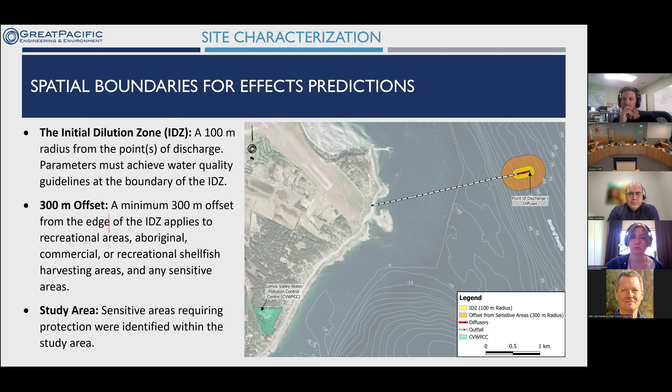Sorry, skipped ahead here. So going back, in 2008 we deployed a current meter off Cape Lazo and did some other oceanographic work. One of the main findings is that your currents generally just flow to the south. Almost all of the time it's heading in a southerly or southeast direction, and it follows the natural depth contours of the water.

So we expect that the majority of our effluent, after being discharged, heads down to the south. And if you see the next slide here, that's generally away into more open waters, away from the shoreline, which is a decent placement for the outfall.

We did a bit of an inventory of potential receptors of concern. So within that 6 kilometer zone, but outside of your 400-meter offset, there's parks such as Kye Bay, Point Holmes, where obviously those are potential concern if people are in the water, swimming, kayaking, paddleboarding, and we wouldn't want those people interacting with the effluent plume.

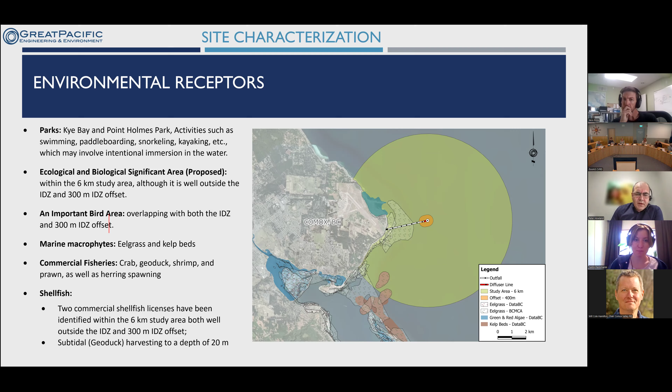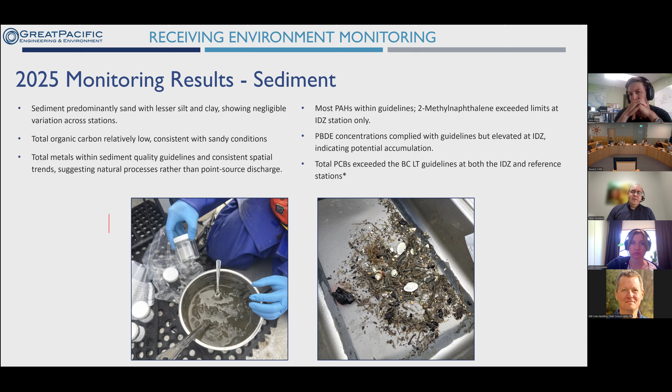So we're not seeing a reduction of our benthic invertebrates at that station. But this is something that would require several years to see if there's any impacts from this. But this first little indication would suggest that things are relatively consistent and actually maybe you have a higher abundance at the point of discharge.

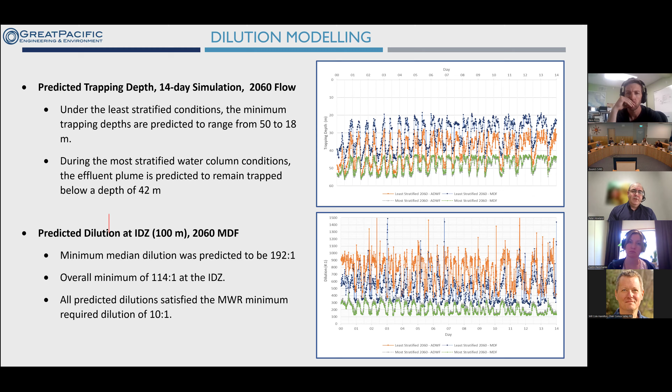So our assertion is these are all quite low risk parameters. So we don't expect there's any chance that you're going to exceed a temperature water quality guideline or total suspended solids guideline. And that's the same for all the zinc, PAHs, PBDEs, PCBs. So these are going to be well below water quality guidelines based on that dilution modeling.

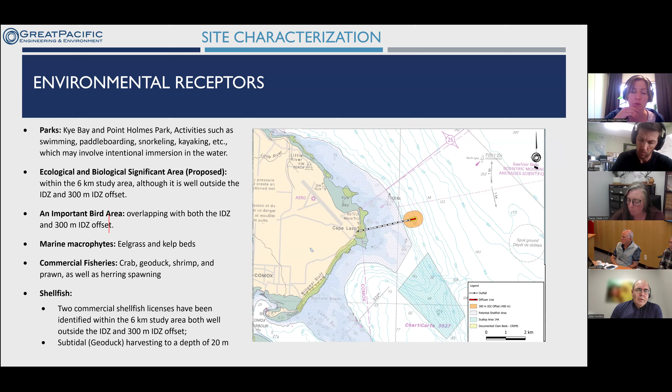Thank you, everyone. Yeah, thanks for sharing, Peter. I really appreciate it. I was just wondering, what water quality guidelines were you using? Were you using like marine aquatic life or primary contact recreation? I'm just trying to understand how you assessed which guidelines you were using. Were you using the most conservative one for any given parameter? Yeah, so I was just trying to see. I think I had, but

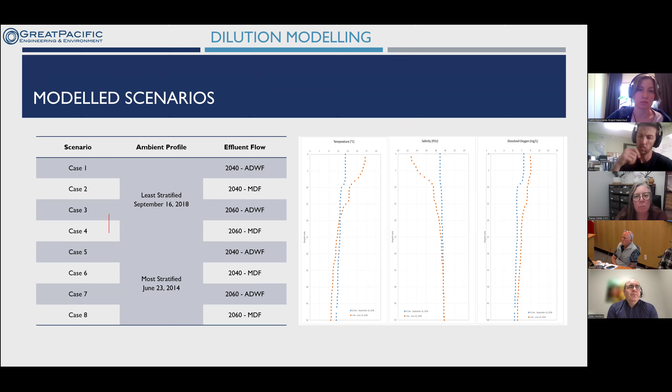yeah, primarily it was marine aquatic life guidelines. So the vast majority of those were compared to marine aquatic life guidelines. All the effluent as well, we compared those to marine aquatic life guidelines. And then there are some guidelines like the shellfish harvesting and recreational guidelines. Those were all included in the program as well.

Okay, great. Is it okay if I ask a follow-up question? Sorry, Caitlin, we're just having a hard time hearing you. No, I was just wondering if I could ask a follow-up question. She wants to ask a follow-up question. Oh, yes, go ahead.

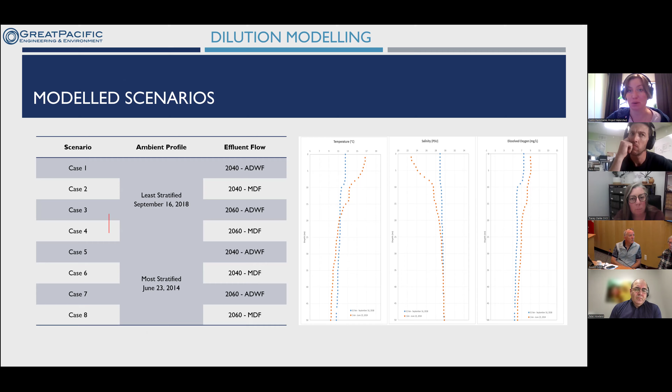Yeah, so I was just wondering if there's the desire to include any other parameters in the assessment. I'm thinking about some up and coming emergent contaminants like 6PPD-Q or some other ones like that. And then because of the importance of this area to shellfish, I think really reflecting on that decision to do some tissue sampling would be really important for future monitoring efforts.

Okay. Yeah, this was the list of the parameters of potential concern, based primarily off of the available marine water quality guidelines. So we didn't extend into parameters that presently don't have guidelines. And just because that list grows and grows pretty quick, we kept it down to all those parameters that have guidelines, and there's something qualitative or quantitative that we can assess it against.

Totally. Thank you so much, Peter. No worries. Thanks, Caitlin. And I think, Ian, you were first.

I'm trying to remember the exact words that I saw, but there was the category 1 reliability, I think, was the words that were used. I would just like to understand a little bit more about what these categories are, so that we can put that into perspective when we're looking at the rest of this presentation. Oh, sure.

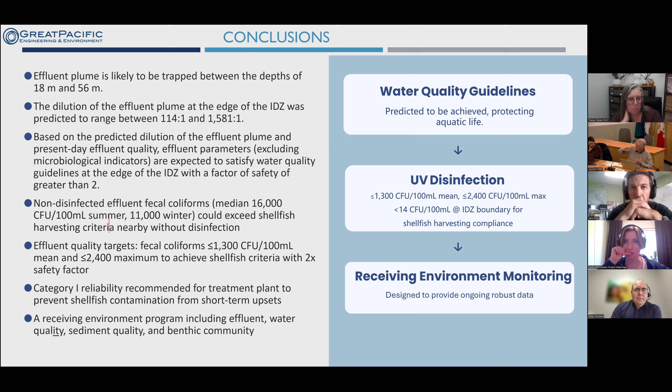There's a 6-meter variation between extreme high and extreme low tide. So we got 6 meters on top, flushing in and out twice a day, and 60 meters depth, where you have a volume every day of liquid going out there. I'm just kind of getting my arms around the scale of what's going on. And I did a little calculation, which was, I think I picked up somewhere a figure of 76,000 cubic meters per day is kind of the maximum amount of liquid that's coming out of the pipe. Is that roughly right? Yeah, I have that number way back at the start.

Okay, now I'm grappling with what does that look like, and I thought, okay, that's going to look like this building, the volume of this building, kind of thing, every day. Something of that order, like a 40-meter cube or something like that, flushing out into the ocean. Now, where am I going with this? I guess let me ask this question.

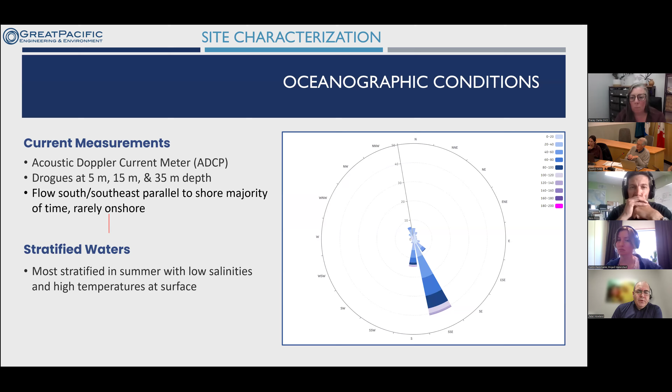Does your study say anything about the adequacy of treatment that's envisaged in the plan for the treatment plant? Does it say that we're doing too much treatment or too little treatment in order to meet the water quality guidelines? Did it say anything about the design of the plant that is good or bad? What does it say? Yeah, so that goes back to our final assessment of the parameters of concern.

Generally my understanding, and now I'm not a wastewater treatment engineer, but for the most part, when you're looking at the municipal wastewater regulation, the design of the treatment plant, generally you're looking at the suspended solids content of that treatment system. You're looking at the biochemical oxygen demand, and bacteria and then maybe ammonia and phosphorus. You're looking at some of those nutrients. So generally, when you're specifying the level of treatment, you'd be looking at those primary parameters.

So we have not recommended additional treatment beyond what is the minimum requirements, which is a total suspended solids concentration of 45 and same for BOD. So when we look at this summary, what we're saying is that everything that we've identified as a parameter of potential concern, we expect to meet water quality guidelines at the IDZ, and therefore we're not recommending a higher level of treatment than what is being proposed. If these water quality guidelines were not being achieved, then we would want to be looking at a higher level of treatment.

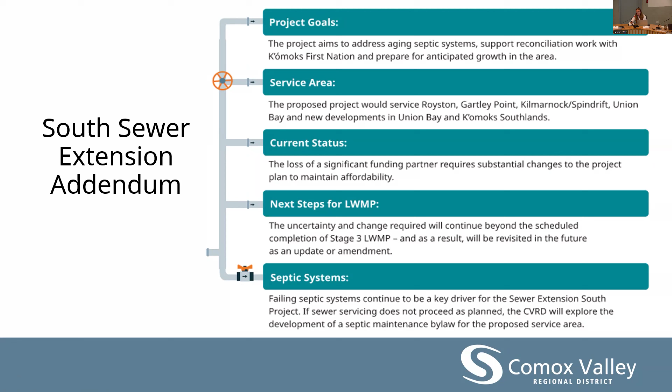Yeah, and this is on the following slide as well, but failing septic systems were kind of a key driver for the project itself. And so this was discussed quite a bit during the addendum process, but if sewer servicing does not proceed as planned, there is a commitment to explore the development of a septic maintenance bylaw for the proposed service area. You can see that in the commitments.

So given the current project status, the Sewer Extension South commitments in the draft Stage 3 LWMP are as follows. A commitment to continue to advance planning and design for the project, considering affordability as a key criterion for successful project delivery. A commitment to continue to seek additional grant funding and partnership contributions for the project, in addition to the $30 million in provincial funding that has already been secured.

And then, as I just mentioned, a commitment to explore development of a septic maintenance bylaw for the proposed service area, which was a commitment carried over from the addendum, given that failing septic systems are a key project driver. And this was consulted on during the development of the addendum. And that's all I have, but I welcome comments, questions.

Anything. Mary? I'm not sure whether this is really facile or not, but if we were looking at installing the South Sewer project and that's been dropped because of the primary funder leaving, is there no way of pairing with the idea of a septic maintenance bylaw to provide low or no interest loans to the homeowners down there? If their septic systems are the primary driver, is there no way of assigning that money to providing that as an option so that we may not need the South Sewer?

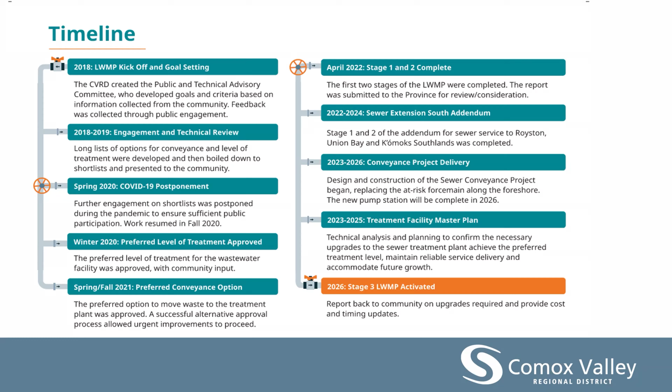So this is just a fairly quick overview of the previous consultation during the stage 1 and 2 plan, really showing the significant amount of engagement that has gone into all of the phases of this planning process. So at that time, 13 TACPAC meetings, as well as some very good public engagement numbers. And within the body of the stage 3 report, you will find a summary of the stage 1 and 2 LWMP consultation, as well as the consultation that was completed on the stage 1 and 2 addendum for the sewer extension south.

So for this stage 3 process, we've had a few different engagement touch points with the community, starting with a new online Engage page in winter 26 and an open house and tour at the treatment plant back in March, which was fairly well attended. And then more recently, ongoing engagement, again through the Engage page, and then a May 5th open house at the CVRD office, which was unfortunately not very well attended, but it is what it is.

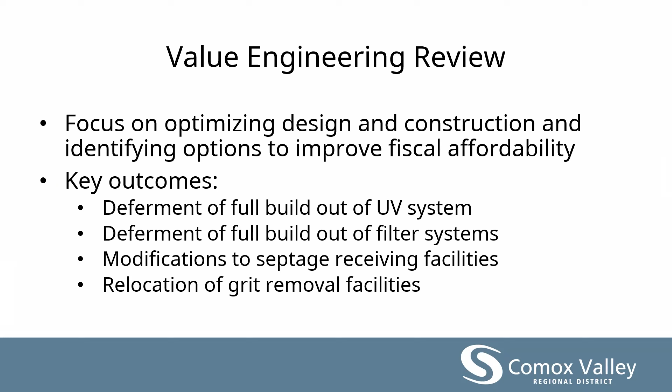I think that's all for that brief overview, but any questions I can try and answer, and if I can't answer them, I'll write them down for Chris to get back to you. I don't want to put you on the spot there, but where you said full build out of the disinfection system, does that infer there's a partial build out for today's flows as opposed to future flows? That one I will have to get Chris to respond to the committee on. Sorry, Jim. Thanks.

Just Ian? Sorry. Oh, sorry. Kevin and then Ian? I think Ian beat me. Go. All right. I'm sure this is going to be why are you asking this question? And I don't mean that in a bad way.

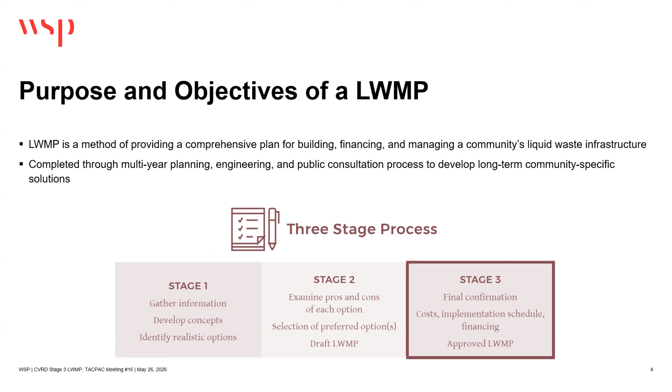And then stage 3 involves confirming the final preferred option, developing the costs, the implementation schedules, and the financing needs, ultimately leading to an approved liquid waste management plan.

So from a regulatory perspective, the liquid waste management plan is not a requirement, it is voluntary. But the BC Environmental Management Act allows local governments to develop an LWMP for approval by the Minister of the Environment, and there are distinct benefits to doing so. So the approved LWMP provides borrowing authority for local governments without the approval of electors to implement the approved liquid waste management plan. Once the final plan is approved by the Minister of the Environment, there is no mechanism to appeal it.

So the liquid waste management plan must demonstrate that an adequate process for comprehensive review and consultation with the public is provided. And then the approved liquid waste management plan also provides the necessary authorizations through the issuance of the operational certificates. And the liquid waste management plan complies with the municipal wastewater regulation, and the ministry also considers satisfaction of their interim guidelines for the preparation of liquid waste management plans when they review and approve the plan.

Okay. And just a reminder of what's been done through the entire process, focusing more on stage 3. At stage 1 and 2, the liquid waste management plan and the sewer extension south addendum both underwent public consultation prior to ministry review and comment. And the ministry review and comment informed the scope of the stage 3 liquid waste management plan, kind of in this middle column here.

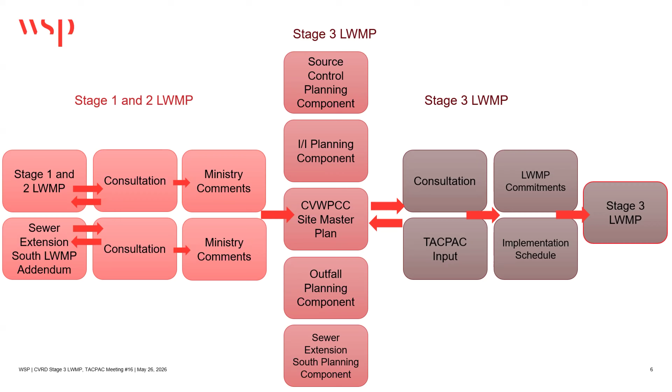Okay, so I'm going to review the summary of the stage 3 commitments and their schedule and cost estimates. So the commitments are grouped by components. There's 9 in total. We're going to go through them one by one. I've already touched on this a little bit, but wastewater treatment, outfall planning, and resource recovery are all informed by the site master planning process. The sewer extension south component was already discussed today.

And source control, I&I, and climate change mitigation and adaptation are all in response to ministry comments on the stage 1 and 2 liquid waste management plan. And then environmental monitoring and liquid waste management plan monitoring are required by the LWMP guidelines.

So, wastewater treatment commitments. The wastewater treatment options were presented in the stage 1 and 2 LWMP, and further analysis was completed as part of site master planning. And site master planning was really intended to guide the long-term planning and phased delivery of the upgrades at the treatment plant. So the first wastewater treatment commitment is to implement what we're calling phase 4 foundational upgrades in the 2030 timeframe, and that's recommended in the site master plan.

So foundational upgrades, those are needed to implement the wet weather treatment strategy, and they include new headworks, tertiary filtration, and UV disinfection, along with other process modifications and expansions, and then investments in the outfall and resource recovery. And the cost estimate and the timeline were also presented in the site master plan.

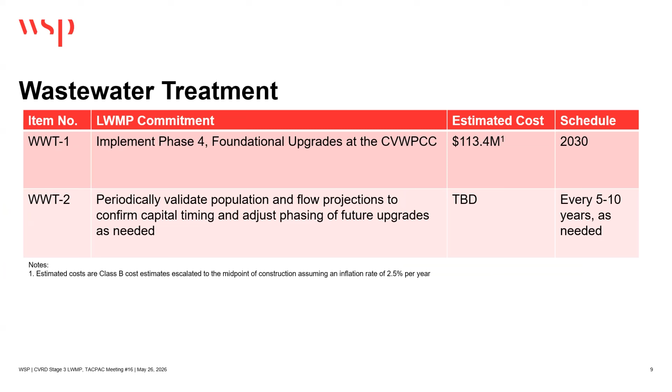So outfall planning. The outfall was constructed in the 1980s, and in the ministry's review of the stage 1 and 2 LWMP, they noted that further studies were required to determine the timeline for outfall replacement. In 2024 and 2025, capacity and condition assessments were completed, and the outcomes have informed the development of the commitments presented here.

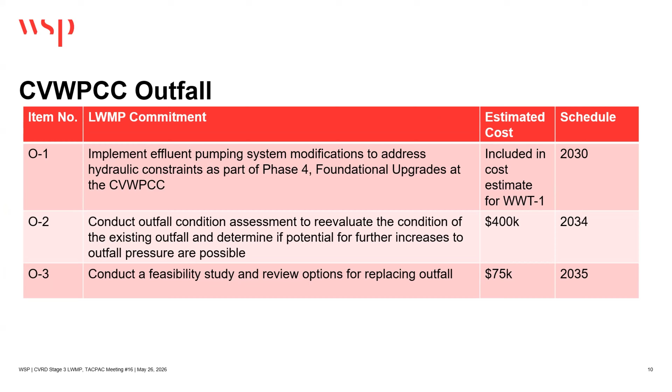So this first commitment, it's also captured in the foundational upgrades that I just mentioned, but it involves modifying the effluent pumping system to increase the capacity of the outfall and extend the service life for another 10 years. And then further studies are presented in commitments 2 and 3, which would be completed before the next liquid waste management plan update. So to complete an additional outfall condition assessment and conduct a feasibility study and review options for replacing the outfall.

Okay. Resource recovery. So the ministry commented in their review of the stage 1 and 2 liquid waste management plan that the stage 3 liquid waste management plan should include a cost benefit analysis of resource recovery options as part of site master planning. So the site master plan considered reclaimed water, heat recovery, and biosolids management options, ultimately recommending on-site reuse of reclaimed water and continuing to produce Class A compost.

The reclaimed water system is included as part of phase 4 foundational upgrades, so wastewater treatment commitment number 1. And then the liquid waste management plan also commits to conducting a capacity assessment of the existing composting facility, and in the future, considering other resource recovery opportunities as conditions change.

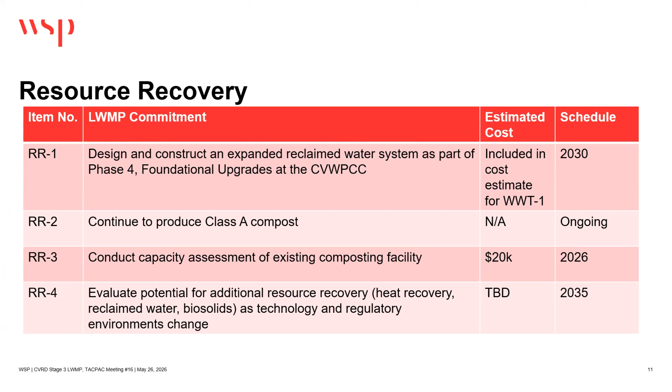So the sewer extension south, we've already talked about these, so I wasn't going to dwell on them, but these commitments are included in the stage 3 liquid waste management plan, and we do have a schedule associated with exploring the development of a bylaw for septic system maintenance, and I will leave it at that.

Source control. So as I mentioned, the ministry's review of the stage 1 and 2 LWMP noted that source control planning should be included in the commitments for the stage 3 liquid waste management plan. So the commitments presented here have been reviewed through the Sewer Advisory Committee and Sewer Commission. The town of Comox and city of Courtenay both have sanitary sewer bylaws that cover many source control components or that are generally used to regulate the way connections are made.

And the first commitment here is to strengthen and harmonize the sanitary sewer bylaws for the town of Comox and city of Courtenay on the 2030 timeframe. And the second commitment is around developing and executing a regional educational campaign that focuses on source control.

Okay, inflow and infiltration. So I have a couple of slides, I think 3 slides on I&I, and that includes all non-sanitary flows entering a sewer system. And the municipal wastewater regulation requires local governments to make commitments to reduce I&I to below 2 times the average dry weather flow. So the CVRD has consulted with the town of Comox and the city of Courtenay through the Sewer Advisory Committee and Sewer Commission to develop the commitments to reducing I&I that are presented here. Derry already talked about this a little bit, but I think they are still draft.

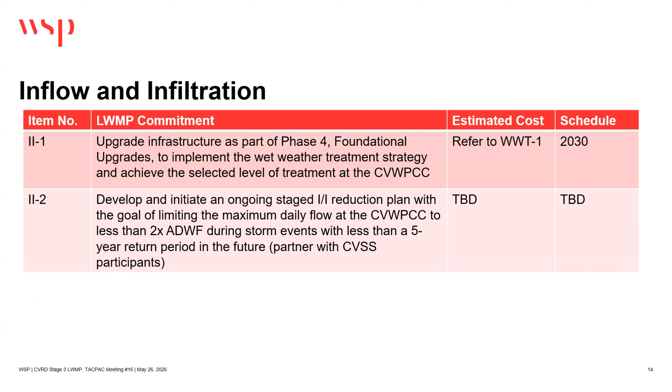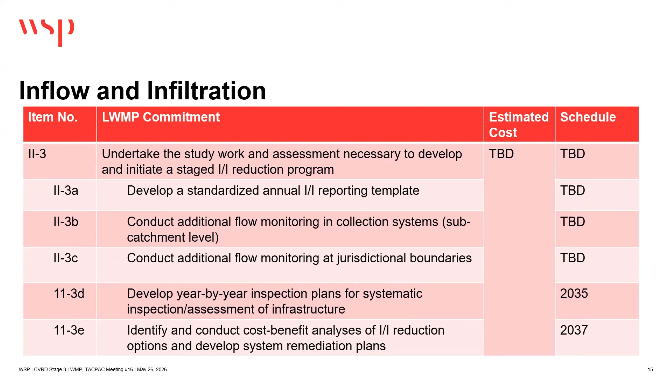So this third I&I commitment has multiple components. The first, the CVRD will develop a standardized I&I reporting template. Comox Valley Sewer Service participants would conduct additional flow monitoring in the collection systems at the subcatchment level. The CVRD will conduct additional flow monitoring at jurisdictional boundaries. And then the CVRD and Comox Valley Sewer Service participants will all develop year-by-year inspection plans for systematic inspection of infrastructure and identify and conduct the cost-benefit analyses of I&I reduction options to develop system remediation plans.

Okay. So commitment number 4, I understand that this is proposed to be removed. Commitment 5 involves reviewing and updating bylaws related to sewer system connections and engineering development standards, and that would be done by both the CVRD and Comox Valley Sewer Service participants. And then commitment number 6, the CVRD will investigate funding mechanisms to help facilitate I&I reduction, program development, and future capital works.

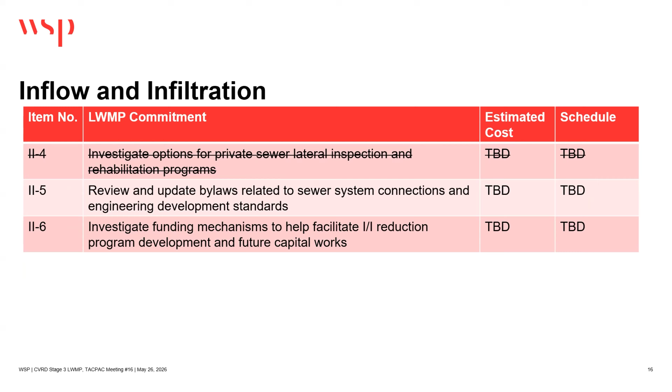Okay. Climate change mitigation and adaptation. In the ministry review of the stage 1 and 2 liquid waste management plan, they commented that the stage 3 plan should link commitments to broader CVRD work being done towards climate mitigation and adaptation, such as through the climate action strategy or the sustainability strategy.

And the stage 3 liquid waste management plan makes 3 commitments: to track and report on greenhouse gas emissions annually, to develop a decarbonization strategy, and to track annual rainfall frequency and intensity of extreme rain events to facilitate future planning.

And then last slide on commitments. I've grouped the last 2 categories together: environmental monitoring and liquid waste management plan monitoring and update. Both are required in the guidelines for liquid waste management plans. Related to environmental monitoring, Peter touched on this in his presentation earlier as well, but the liquid waste management plan commits to completing an annual receiving environment monitoring program for treatment plant discharge.

And then liquid waste management plan monitoring and updates. The liquid waste management plan commits to establishing a plan monitoring committee, to reviewing plan progress and updating as required, and providing regular status updates on commitments, and then conducting the first review of the liquid waste management plan within 10 years or around the 2035 timeframe. So those are the commitments.

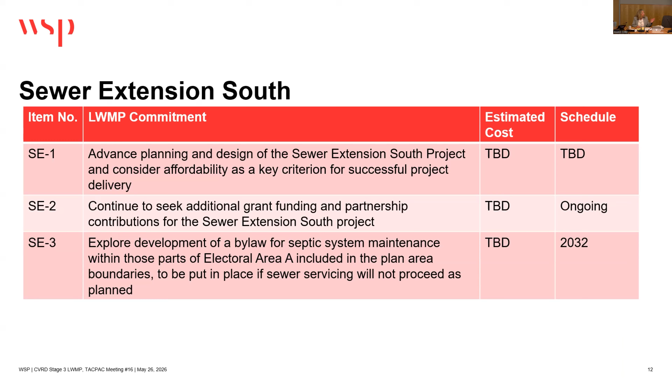That really is the conclusion of the... I guess we're not going to get... We did have a couple of items that we hoped that Chris was going to be able to respond to, and we're not going to be able to do that, right? And you'll want to respond to the chair's request for an update. Okay. Yeah.

So I just wanted to provide these couple of slides on next steps, just so that everybody's aware of kind of the process from here. So in June, the Sewage Commission will review the plan along with this committee's feedback and motions, and hopefully approval of the Stage 3 LWMP will take place at that time.

And then this summer, we will conclude First Nations review of the plan, and the plan will be submitted to the ministry pending no material comments come back from First Nations. And then operational certificate application will also be submitted to the province, as well as continued design of the phase 4 foundational upgrades over the summer.

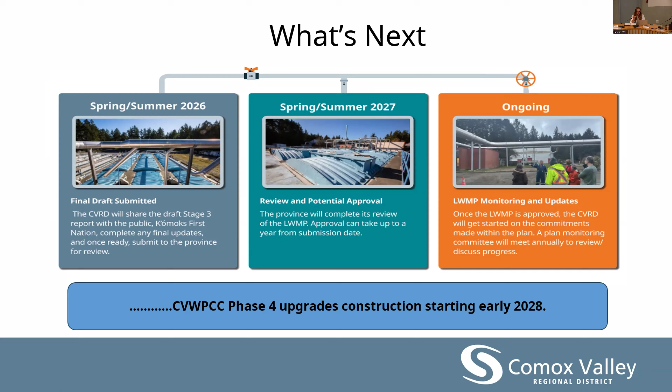Yeah, and then from there, spring, summer 27 would be review and potential approval of the plan by the province. And beyond that, ongoing would be liquid waste management plan monitoring and updates. And I think we had mentioned that a plan monitoring committee will be established and will meet annually to review and discuss progress on the plan. And then this one we've already accomplished, yeah.

I'm glad to see that. I was under the impression that the ministerial review was going to take 2 years, but it's only 1 year. So that's not so bad in the greater scheme of things. Yeah, I think those are estimates certainly. Any questions about next steps, Kevin?

Sort of next steps. Is there any way we'll hear back about this recommendation to the sewage commission about the bylaw and such? Just because, if this is the last meeting, I'd just love to be in the loop somehow. That's all. Yeah, certainly we can follow up with the committee on the conclusion and the recommendations coming out of the committee, as well as the final plan that goes forward to the province. It'd be great after the sewage commission meeting to have a little update. That would be great.

I guess the one thing that just came to mind is we actually created a commitment today, right? There was a commitments table in the document, wasn't there? So I assume that motion we did that updated a paragraph in the report also created a commitment, did it? Yeah, so it would be a recommendation to a corresponding update to the commitment relevant to that paragraph. Is that what you mean? Yeah.